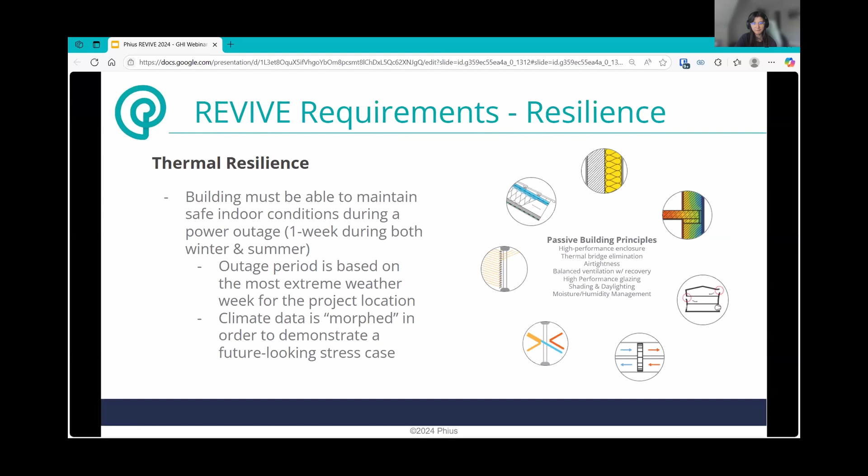And then we have the operational resilience piece. So during the outage periods, critical loads need to be covered. So we require balanced ventilation. So the ventilator needs to run at 5 CFM per person during the outage. We also require 33 watts at least per unit for miscellaneous electric loads, the refrigerator and any other critical loads that the owner determines are necessary.

And so this is where the core and zero thing come into play. So any fuel source can be used for the core tier, including a natural gas generator. But for the zero tier, this has to be done completely renewably. So PV and battery.

And then the decarbonization requirement is called the ADORB cost. So this is annualized decarbonization of retrofitted buildings cost, and it is the sum of the direct energy cost of the project, the building retrofit measures, the cost of carbon upfront and embodied, the operating cost of carbon, and the energy system transition cost. And then we're also giving teams credit for additional decarbonization effort. So material swap outs, business practice changes, etc., can help lower your ADORB cost. But the criteria is basically that the post-retrofit building must not have an ADORB cost greater than the baseline.

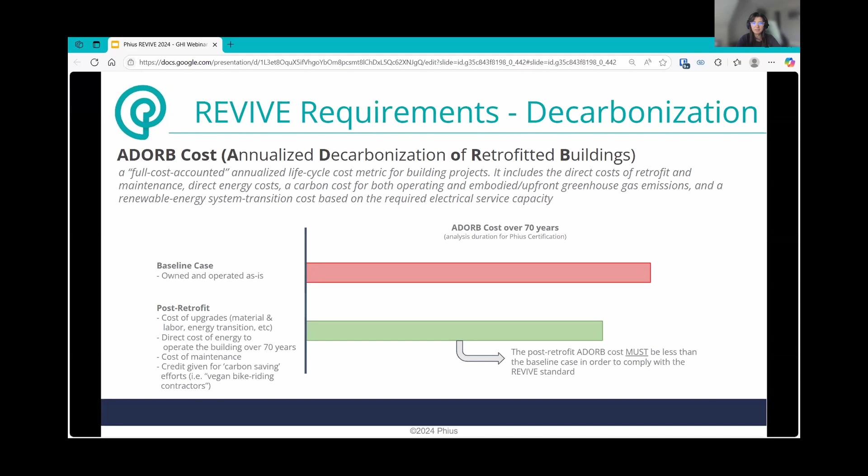So again, we're looking at an analysis duration of 70 years for Phius certification. And so the baseline case is going to have a certain ADORB cost over that 70-year period. The post-retrofit case must be less than the baseline case in order to comply with the standard.

So, how do we determine whether the project meets the resilience and ADORB cost metrics? Well, we've developed in-house the REVIVE Calc modeling tool. So, this is a new free open source modeling tool. It can be found and downloaded on our Phius REVIVE GitHub page. It runs on EnergyPlus basically and is used to automate resilience and annual simulation and life cycle cost analysis. And it's completely based on the calculation protocols outlined in the REVIVE standard document itself. And it also supports parametric iterations, so you can run 2 cases or you can run 100 cases. It's a pretty cool tool to use so far.

We do have a handbook on how to use the tool. So it comes with step-by-step instructions on how to use the tool. There are also training videos that are linked at the beginning of each section, and there will be updates coming soon. It's a very new tool. There are some bugs, but we are looking for testers and people to use it and try it and give us feedback.

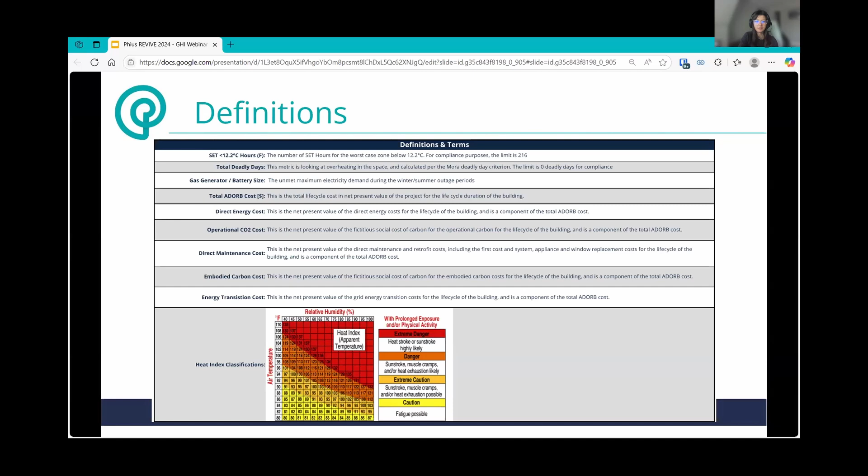So these are some definitions and terms that I'll probably be using as I walk through some of the single family and multifamily examples. So you can come back to this and refer to it at your leisure.

So yeah, thermal resilience. This is what we're looking at for the winter case. These are the hard requirements of the winter thermal resilience outage. So in order to comply with the standard, the project has to have 0 hours below 35 degrees and less than 216 SET hours, which is the standard effective temperature, which is 54 degrees Fahrenheit. And those hours are during the outage period. So when your power's out and you don't have any heat, can the building stay above these thresholds?

And then again, for operational resilience, the critical loads are the 5 CFM per person and 33 watts for MELs. And just a note on the winter thermal resilience criteria, active heating is not permitted during the winter outage period, which will become important when I talk about the cooling outage period.

So as I'm going through these hard resilience requirements, I'll also be showing you some example projects. These are feasibility studies that Phius has completed just within the last 6 months. We've got a single family project. It's a historic retrofit in Washington, D.C., and a single family kind of ranch style home in Eugene, Oregon.

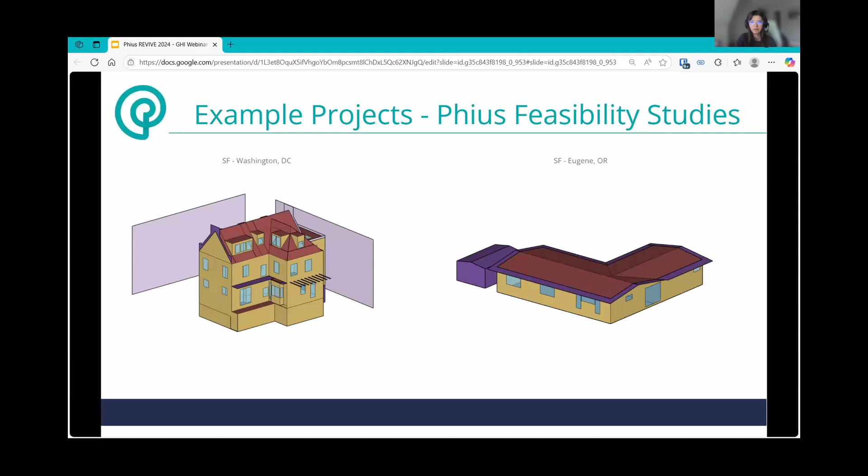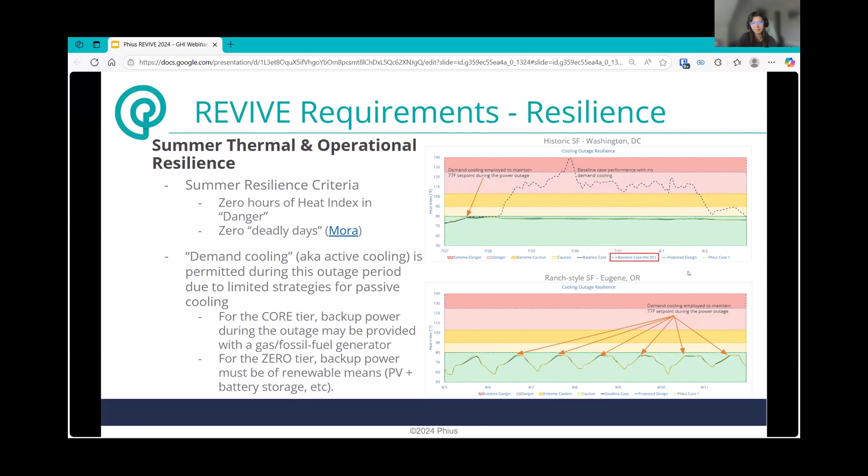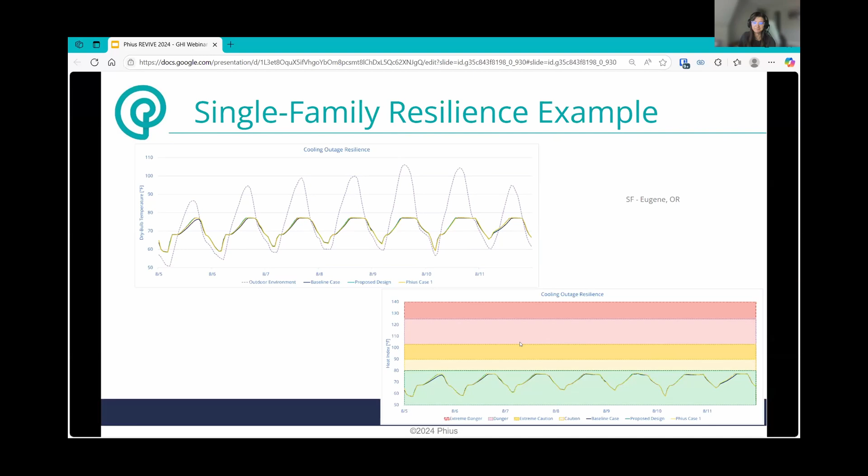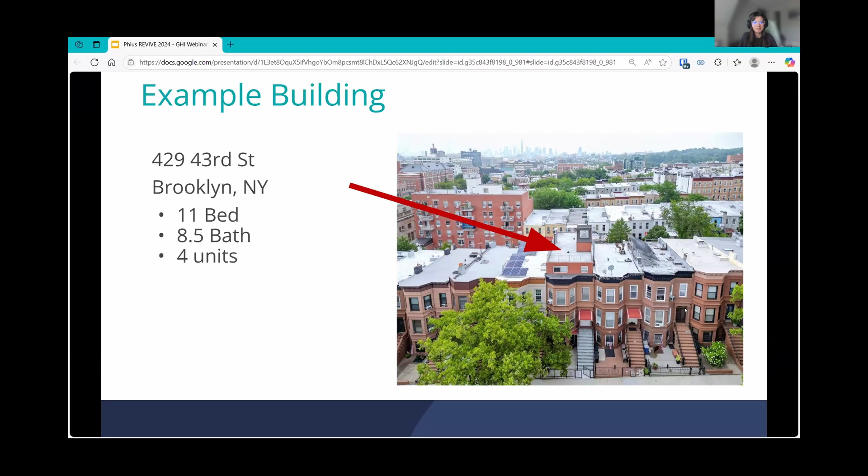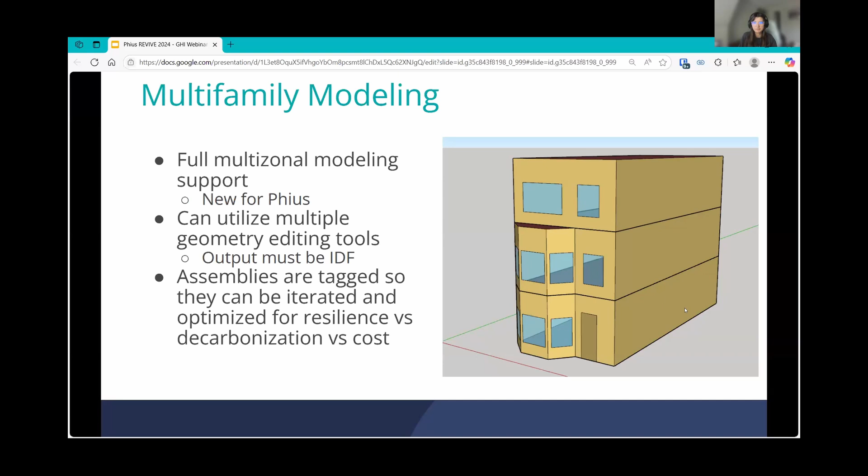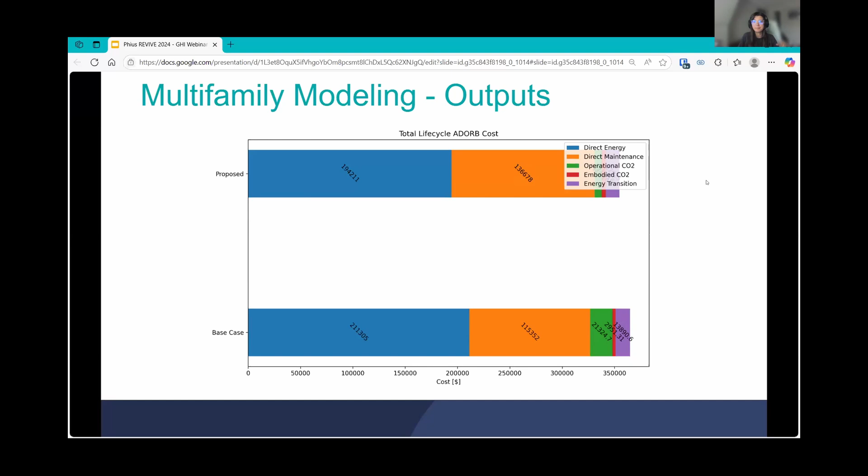So these are the graphs that come directly out of the Revive Calc tool. The other ones that I had showed before are kind of what we've been formatting from the results files that are generated. But this is how it'll look when it comes directly from the calculator. And again, the definitions for all of these pieces are on that initial slide. Direct energy is the energy required to operate the building. Direct maintenance includes replacement costs, first costs for the baseline or for the proposed case, appliance replacement, window replacement, that kind of stuff. Operational carbon, embodied carbon, and the cost of energy transition.

So yeah, again, this is the output directly from the calculator. It is in SI units. But we can see that the baseline case, and this is also looking at two different apartments. So this is looking at apartment 2 and apartment 4, which would be like the worst case scenario apartments. And we can see that they are well below the SET hours in apartment 4 in the baseline case.

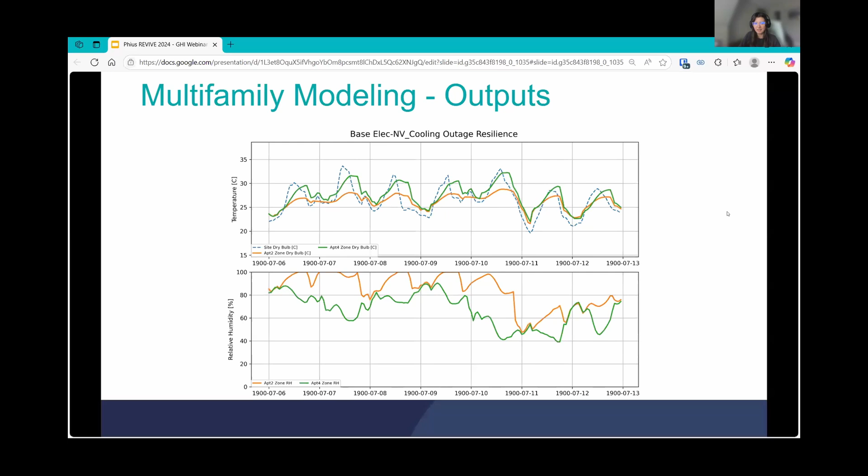Whereas in the upgraded case with an IECC envelope and some better air tightness, there's a lot less fluctuation in both the temperature and relative humidity. And the project does end up meeting the SET hours. And then for the baseline, yeah, we can see a lot of dramatic things happening on the temperature and relative humidity in the base case. So as the building stands, we can see it's probably not very comfortable to be in during an outage period.

So in summary, the base case is not efficient or resilient. The life cycle cost was almost identical, but that also came with a 35% reduction in energy, 12% reduced energy cost, and also comes with thermal resilience. So the people that live here are going to be safe and sound even during these extreme weather outage periods.

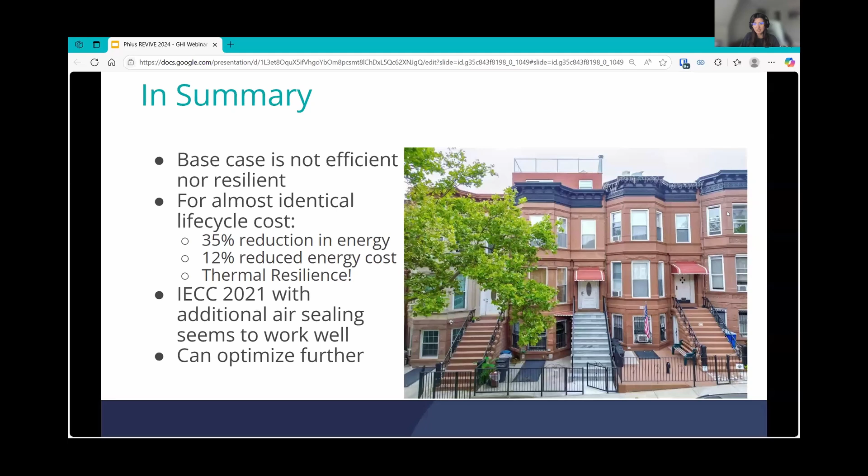The IECC 2021 envelope with additional air sealing seems to work well, which was also demonstrated in the DC and Oregon projects. But there's still room to optimize further. We don't have to stick to air tightness. There are other knobs we can turn.

And yeah, so the future of Revive, as it is a brand new standard, there's still a long way to go. We need projects to test it out and help us learn where we can improve. And we need people to ask questions and understand how we can be more clear in our guidance going forward.

So all of our current Phius Revive 2024 resources can be found on the Phius website, and coming soon will be the Phius Revive 2024 design and implementation workbooks. We'll have calculators and tools come out as time goes on, and we'll continue to make developments and updates to the Revive Calc tool.

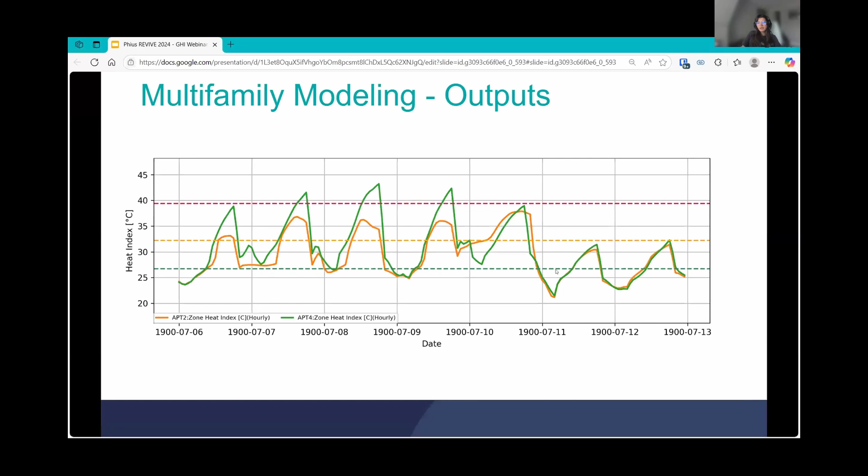Yeah, so that's kind of the prime difference between Revive 2024 and the new construction program. On the new construction side, the main outcome goals when they were created were comfort, long-term affordability, and durability, and these other categories were kind of secondary benefits. So with the Revive 2024 program, we're kind of flipping that script. We're more focused on safety and resilience, but the secondary outcomes of that are comfort, long-term affordability, and durability. So they're all in play here; we're just focused on different things.

Yeah. Typically people associate passive house immediately with triple pane windows, R80 attic insulation. So is the answer really to run the models and see if you have a resilient building, not that you necessarily have to put in triple pane windows or pump R80 into the attic? Is that a correct top level response? Yeah, yep, I would say so.

I mean, it's such a balance of cost and resilience. So by focusing on resilience first, it's like, what's the bare minimum we have to do to make this building safe for people during an outage? You still have to meet your comfort and condensation requirements for the new construction standard. But yeah, I think the typical conceptions of what makes a passive building are still there, but they're not as extreme as the new construction.